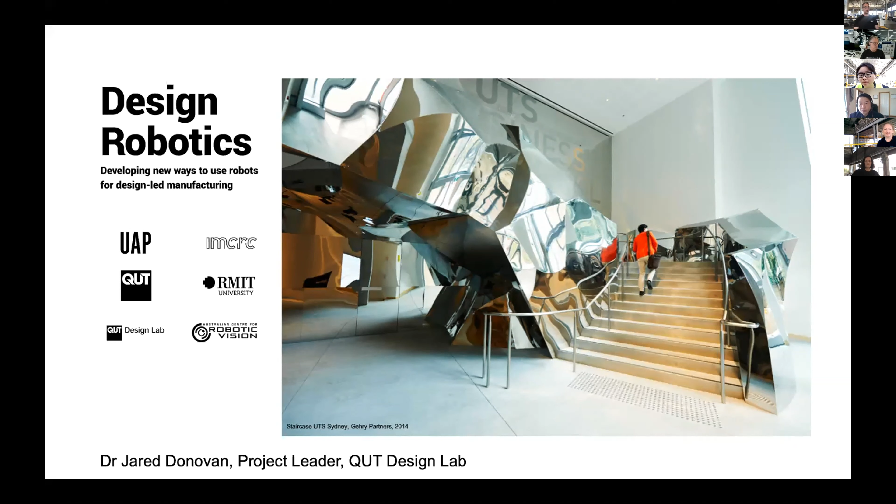That's probably enough to get us started, and I'm going to hand over now to John, who's going to start telling us about robotic vision.

Hi everyone, so I'm Jonathan Robertson. I'm a chief investigator on the project. We've got a section here where we're going to talk through robotic vision.

I'll start off with a bit of an introduction, then hand over to Amelia, who's next to me here. We'll then hand over to Jing, and finally over to Peter Corke, who's back in one of our labs at QUT.

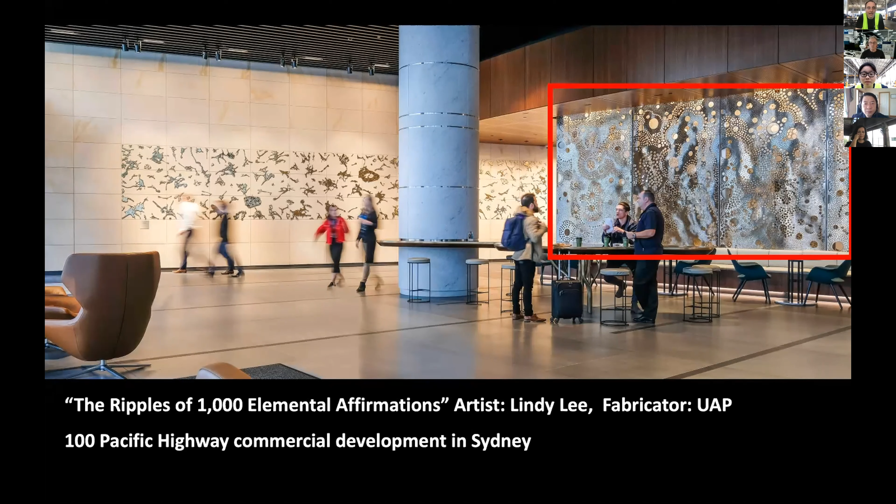What I want you to look at is the screens on the right hand side. These are flat sheets, and these holes and patterns you see there are put in by Lindy Lee herself. But there's some work that has to be done first before she can design her artwork, and that's a technique called linishing.

So these panels have to be prepared. Now, this is backbreaking work, very time consuming. You can see a tool there known as a burnisher, and we'll show you one of these on one of our robots in a little while. It's effectively a sanding task, and linishing just stands for linear finishing.

An operator here, in this case Matteo, who is based at UAP, has to stand there and linish this panel by hand, and it's very time consuming.

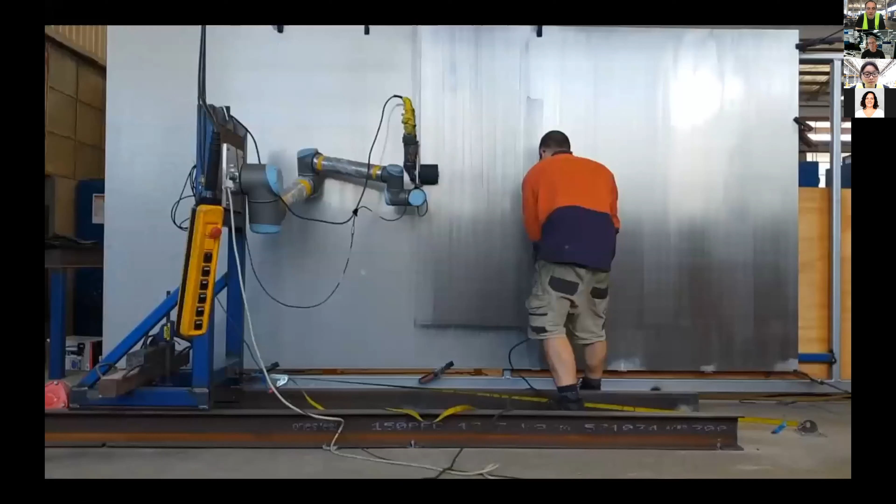So I'm going to show you a video now of a robot version of this linishing task. Matteo came to the team here and said he had to linish, I think it was 8 of these panels, and he knew it was going to take him a very long time. The estimate was about 24 hours per panel of him holding the burnisher, which, as you can imagine, is a lot of backbreaking work.

So Matteo worked with Amelia, who you'll see in a little while. They worked for 3 days and designed this robotic solution. You'll see Matteo's still there, he's still part of the job, but he's no longer doing the backbreaking work most of the time. He's lubricating, changing sandpaper, checking things out, and he's actually dragging the robot along - that's not a motorized system there. And then the robot is actually doing the linishing task.

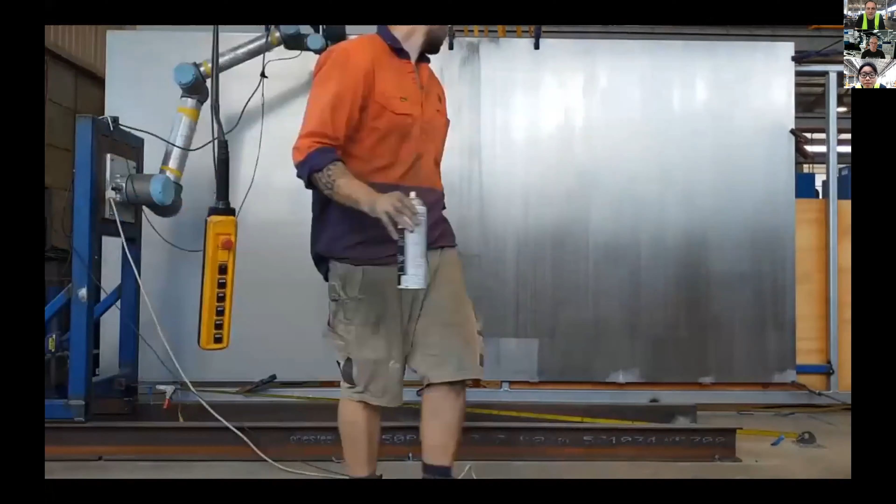Now, this is a relatively simple task for robotics. It's a 2D plate, known as an open loop system in the fact that the robot doesn't really know the plate's there. It's just been pre-programmed to go up and down, which means it actually misses some of the plate. If you look at the bottom of that plate, you'll see some parts that have been missed, where everything's slightly misaligned and the robot doesn't quite touch, or it can't reach. There's a few reasons why it may miss, but basically the robot doesn't really know that the plate is there. So we're trying to increase the sophistication.

We've now moved on to doing 3-dimensional finishing. Now you'll see here an artwork called The Kingfisher, by an artist called Emily Floyd. Again, this is fabricated at UAP in the shed next door. We've been focusing on finishing the feet of this bird. This particular bird is actually on the river walkway outside our building at QUT at Gardens Point here in Brisbane.

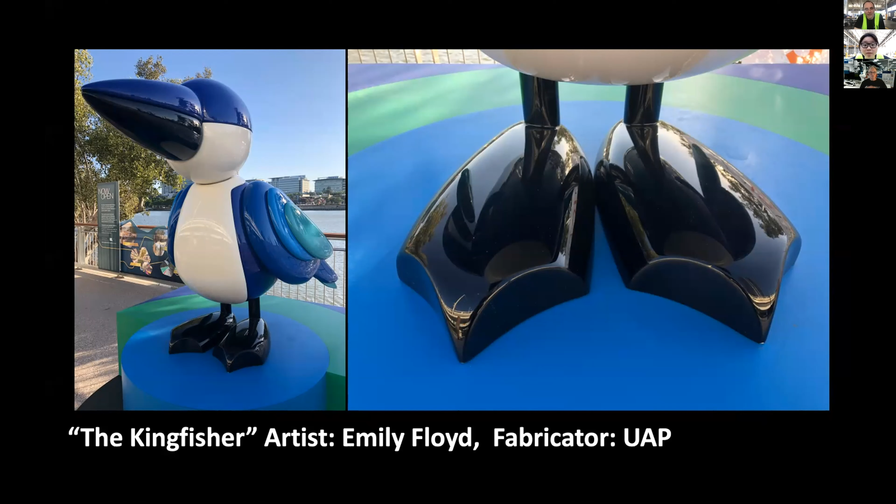And I should have put someone in there for scale, but it's kind of the height of a shortish adult. That's kind of the scale of this thing. So you can see this foot is relatively complicated, and just having our kind of open loop systems wouldn't be good enough to actually finish this foot.

So now I'm going to hand over to Amelia, and she is going to talk through our strategies for finishing 3D objects like this. Thanks for the intro, John. So as you said, I'm Amelia, and I'm a mechatronics engineer as part of the Design Robotics project.

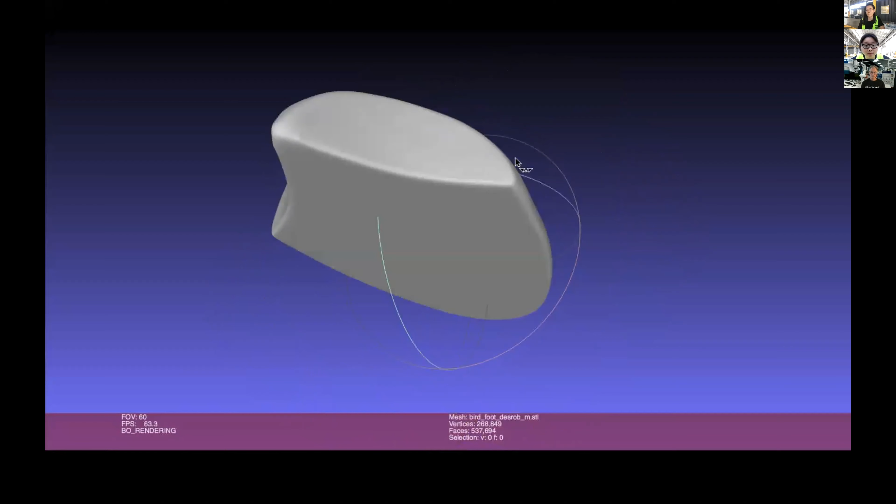So this first video here is actually a 3D scan of the bird foot that you just mentioned. It's quite common in manufacturing companies to actually have a 3D model of whatever thing they're about to manufacture, but it's not common for people to actually use it in the manufacturing process. So what we've tried to do is, one second, let me.

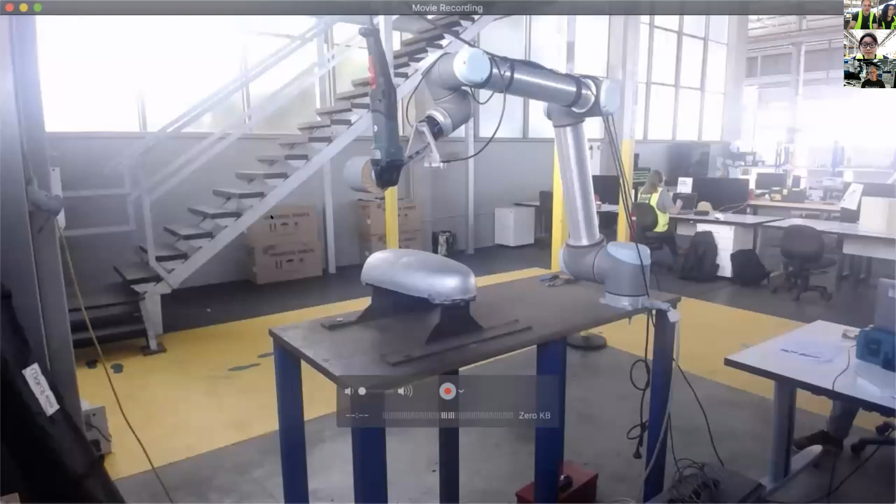True robot demo fashion. Hope it works. Let's start the robot. There you go. Yes.

So what we've tried to do is actually incorporate 3D scanning for two real reasons. The first one being when you actually have a perfect 3D model of a piece that you want to manufacture, it's not actually perfect, because actually making a physical model typically involves, in this instance, a casting process.

In this case, we mill it out using another robot, not this one here, to make a mold, which then goes into a sand mold and molten aluminium goes through and evaporates that mold to give us the product that the robot is currently scanning. Once we make that first mold, it's used as a template for future molds. And as you do that, it actually shrinks by nature of the process.

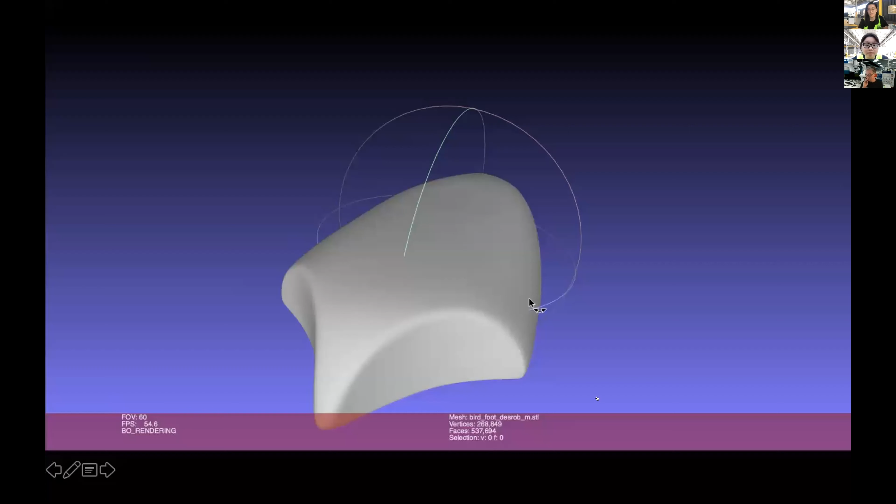And so this perfect 3D scan that I will now show you, go back to, this one. Yep. So this model that we were showing before is actually slightly larger than what we actually have. And of course, this shrinking is never uniform, so it's always a little bit annoying when you're trying to use it in the actual process. So that's the first reason for using 3D scanning.

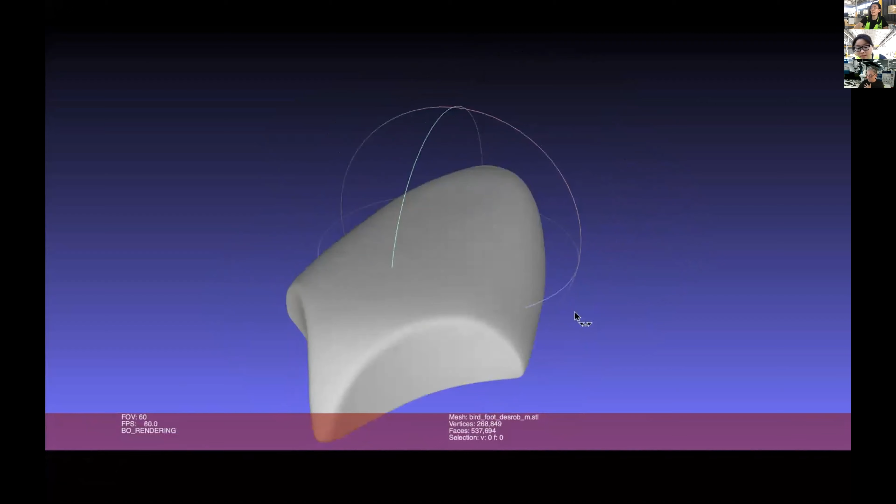And then the second is we actually need to be able to locate where this piece is in space with respect to the robot. Our 3D scanning in that demo gives a very rough estimate of where the bird foot is in space, and a very rough guess as to the size of this object, so putting it in a bounding box, we can generate a grid of points that the robot will visit and capture snapshots of what the object actually looks like.

So what we can see here in the red box is, in this instance, I think it generated 15 points based on the camera's field of view. Those are just 4 snapshots there. I'm not sure how familiar people are with this, but 3D scanning shiny, reflective, specifically metallic objects is always difficult. And of course, your environment impacts quite significantly. As you can see here, there are these little holes.

But if we capture enough of these, we can actually stitch them together, which is what the top right scan is here. And then it completes a somewhat complete model of what we need to deal with. And this model on the bottom here is just a filtered version, because it's a very dense point cloud, and that involves a lot more computing power that's not necessarily useful.

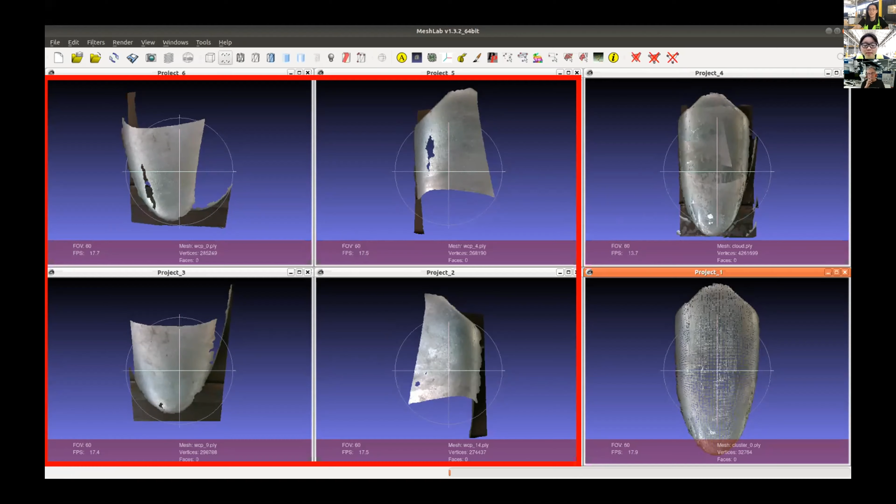This is also just a little video that I made that shows it stitching together. And this is purely based on knowing where each of these grid points are. We can just put all of those little snapshots together. And then this is a little video of what the filtered scan looks like.

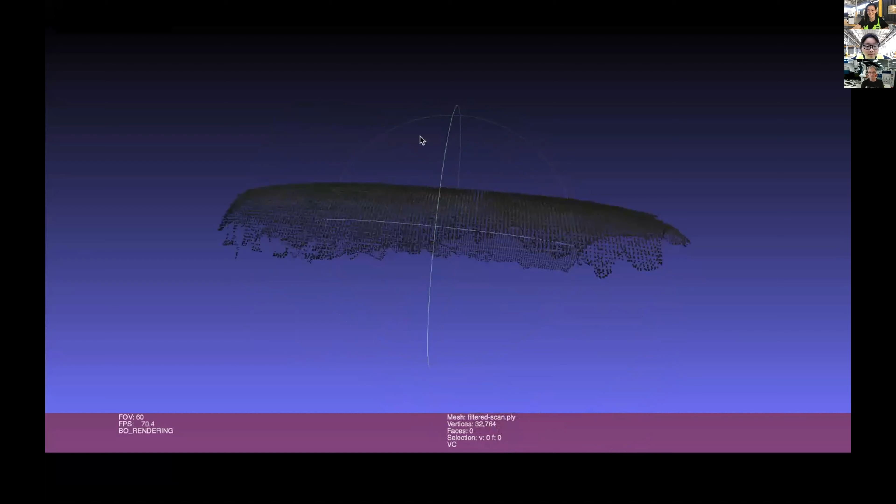Yeah. So once we actually have a scan, we need to actually finish it. Of course this involves path planning, and we do this through Grasshopper in Rhino. We essentially segment this model and generate points, and then we can execute them using force control at the same time.

But of course, this being an automated process, how do we actually know? Also what John was talking about before: instead of having an open loop problem, we would ideally like a closed loop problem where the robot can get feedback and figure out when we actually need to stop. So that brings us to Jing.

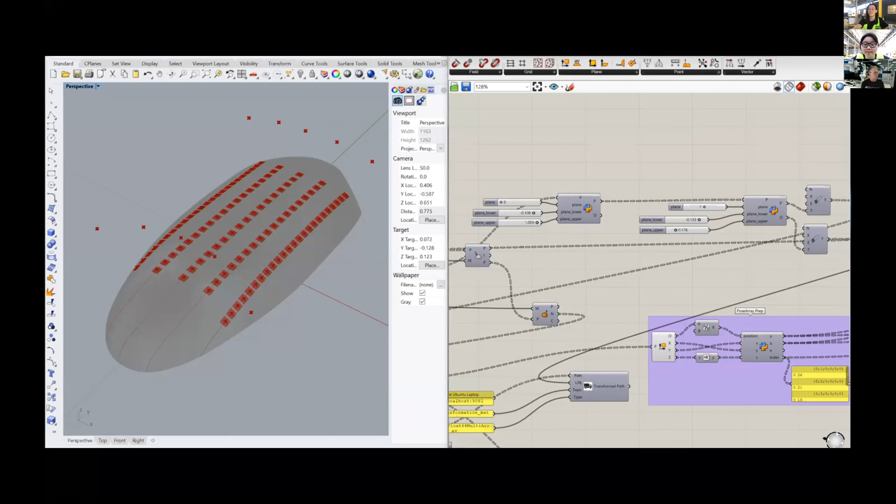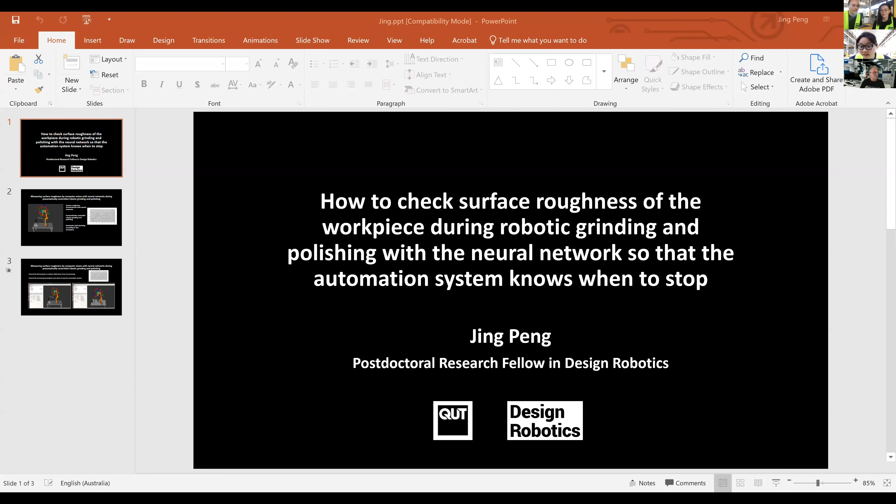The topic I want to share with you today is how to check surface roughness of the workpiece during robotic grinding and polishing with a neural network, so that the automation system knows when to stop. To solve this problem, we need to think about three elements. One is surface roughness measurement, an in situ surface roughness measurement with a neural network. One is pneumatically controlled robotic grinding and polishing. Another one is automatic path planning according to the workpiece.

This figure shows our test images of our neural network. Firstly, we used pictures of rough, medium, and smooth surfaces to train our neural network. Then we used different pictures to see if it can put the images into the right surface roughness categories.

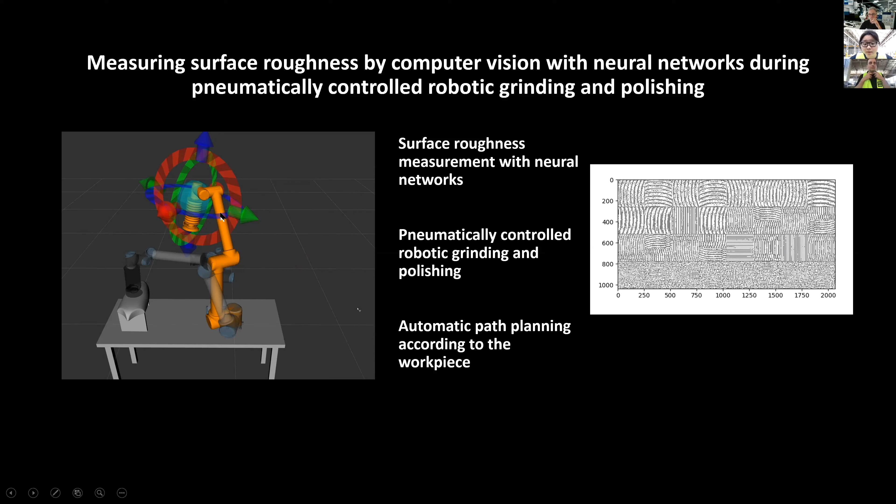For pneumatic control, this soft actuator here applies a certain downforce to the workpiece with physical compliance, and this orbital air sander here can both be pneumatically controlled. So our application is like this: a robot with a camera. When the robot with a camera sees the workpiece, it can automatically do path planning and follow the path.

Then it takes pictures of the surface and runs the pictures through the neural network to measure the surface roughness. If it's rough, it can continue grinding. If it's medium, then it can adjust its processing parameters, like the speed and the rotation speed. When the surface is smooth enough, it can stop running and go back to its rest pose.

So in our application, we need to implement one control loop to control the soft actuator to achieve the ideal downforce of processing, and implement another control loop with computer vision to control the processing parameters and when to stop the automation system.

As you can see here, it runs and it can stop. It's like an electric kettle. You press one button, the water is boiled and the kettle is turned off. So you can leave the workpiece there until the robot finishes its job.

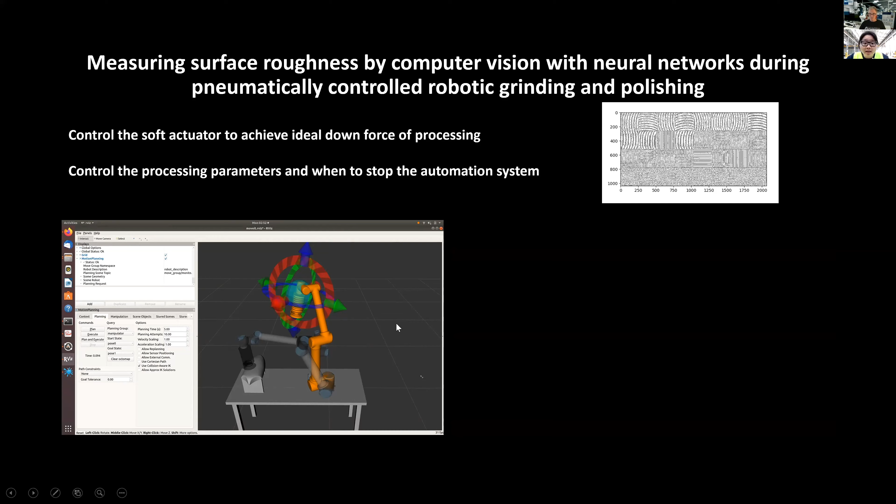So what I want to do is bring together some of the topics that have been mentioned by Jing and Amelia, and what the real challenges are for doing this with robotics today. Robotics is a mature technology. It's 60 years since the first robots entered manufacturing plants. But we still don't see robots routinely doing jobs like linishing and grinding. So why is that? I just want to touch on some of those questions.

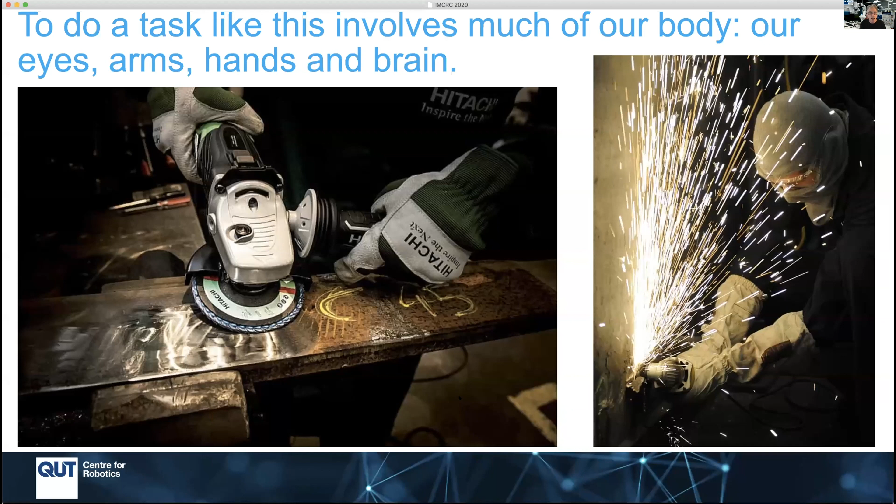A task like linishing, grinding, polishing is at the moment done by a human who picks up the tool, applies it to the workpiece, and does the job. This involves much of our body. It involves our eyes, the muscles in our arms to hold and apply the tool, our hands to grasp the tool, and our brain is doing an awful lot of work. So it's not just manual work, it really is a whole body exercise. Eyes, arms, hands, and brain are involved.

Even if you're unskilled, if you were asked to grind a piece of metal, the first thing you'd do is pick up the tool, and then try to find the thing you need to apply it to. This is probably an exaggeration; probably the workpiece is mounted on some pedestal on the factory floor. But you need to know where it is. And human beings are remarkably good at recognizing objects in the world.

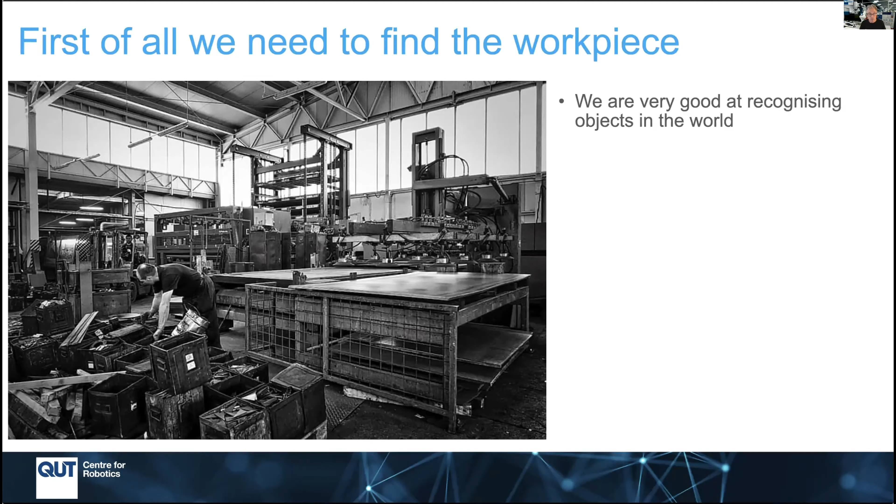Amelia showed some examples of building a model of an object whose shape perhaps we don't know in advance. We can use laser scanners and RGBD cameras to give us the shape and the position of the object. Once we've got that information in what we call a 3D point cloud, we can compute not only what the object is and where it is, but also the orientation of its different surfaces.

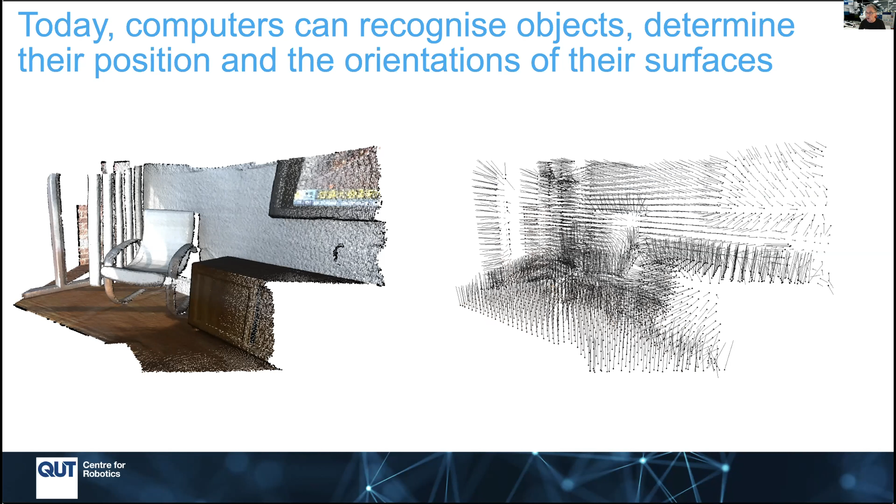Over on the right-hand side, there are all those needles, and they're basically normal to the local surface of the object. So that's pretty good. If you've got a camera system, you can recognize the object and work out the orientation of the surface, then we can bring the tool toward the surface, orient it correctly in space, and off we go with our grinding or linishing operation.

Now, robots today, and some of the ones that you saw in the videos, are the ones that you can just go to the shop and buy, a big industrial robot. They are remarkably capable machines. Modern robots are very strong.

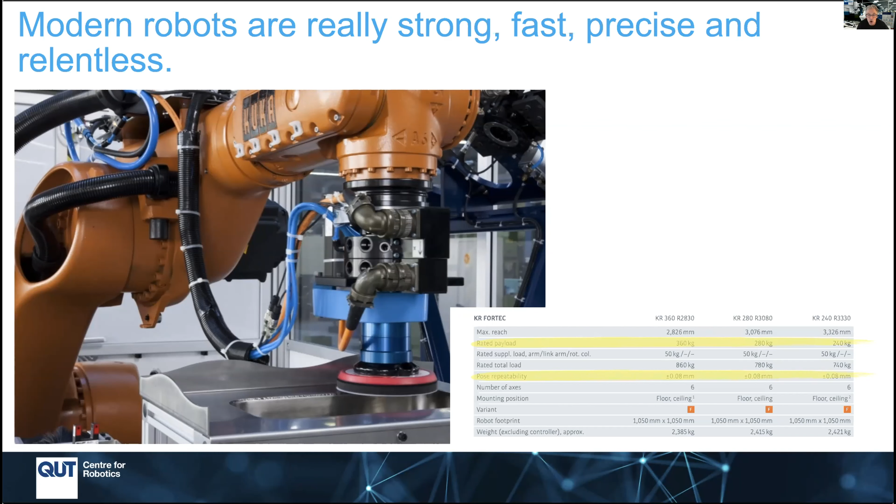So strong, fast, precise, and the other advantage of robots, of course, is that they are relentless. They go 24/7 and they won't get tired. So if I've got sensors that tell me where the object is and how it's oriented, and I've got a robot that's strong enough to wield the tool, is that enough?

And I'm going to say, no, it's not, because there's always going to be very small errors. The camera is not very precise, and the camera only says where the object is with respect to the camera. And the problem is we don't know where the robot is with respect to the camera.

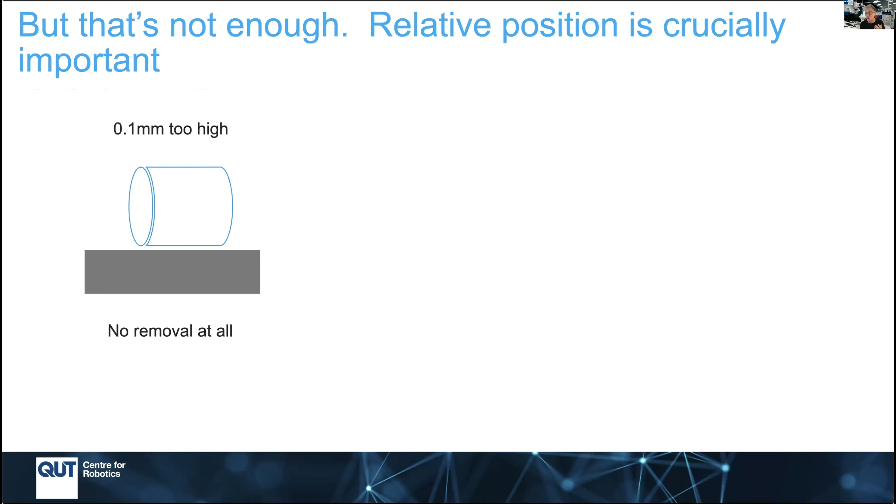And so if you have a very small error, say you're out by 0.1 of a millimeter, your linishing drum is 1/10 of a millimeter above the surface, then you're not going to do any grinding at all. You're not going to do any metal removal. And John showed an example of that at the bottom of that vertical plate.

On the other hand, if you're 0.1 millimeter too low, then you're going to be gouging out a lot of material. And that's going to damage the surface. It's going to damage the finish. So that's not very good. You want the Goldilocks solution where the linishing drum is just right. And so how is a robot going to do that? Or more interestingly, how does the human do that?

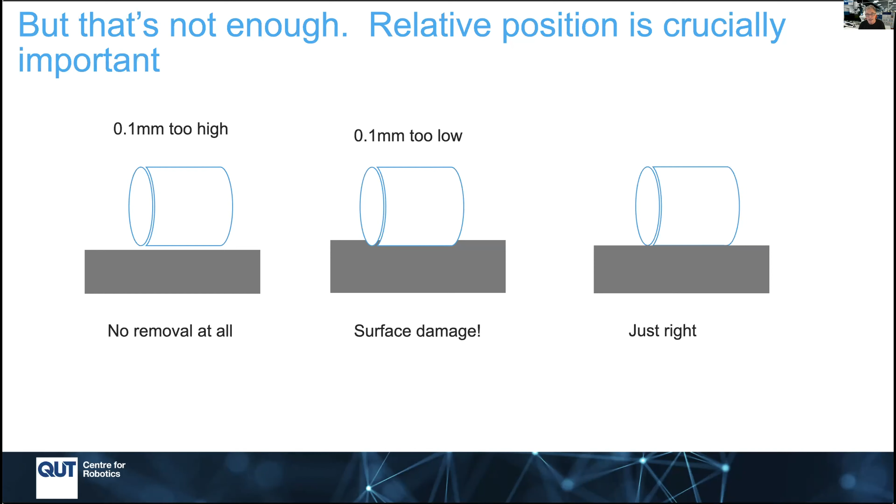And the human does this by using hand-eye coordination at one level to bring the tool close to the object. You use your hand and your eye and you minimize the error. And so the human being isn't measuring coordinates in X, Y, and Z.

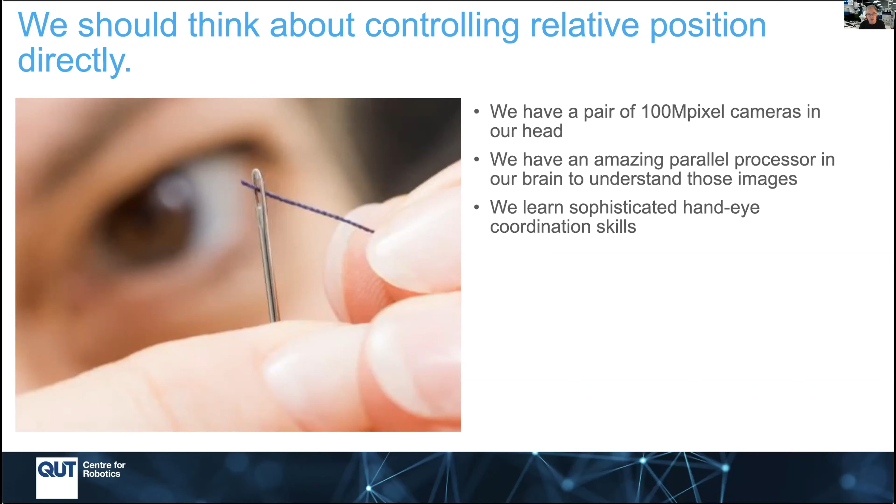The human who's threading the cotton through the needle, they don't know the position of the needle or the position of the cotton. They just want to make the difference between those positions equal to 0. And that's a really important principle that we need to bring towards robotics. So we use this hand-eye coordination skill.

But the other skill that we use in an operation like grinding is that we control the force that we apply through the tool to the workpiece. And that's really critical. And in our body, we use information that comes back to us from all the nerves that are embedded in our muscles to measure the force that the tool is applying.

We can feel the vibration through our fingertips, and we also use that to control what we're doing. And we also hear the noise from the grinding process through our ears, and we feed that back into the process. So we're using all of this rich sensory information to control the intensity with which we're doing the material removal operation. And that's what's key.

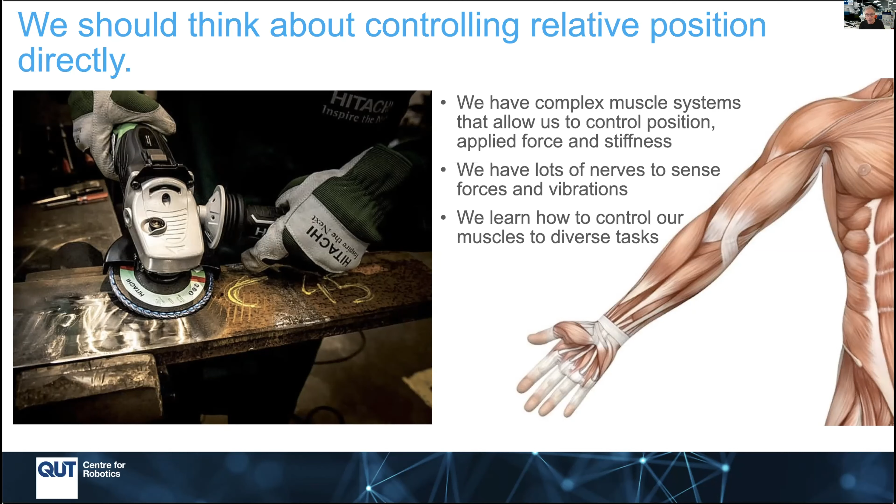And that's why a standard robot, although it's very strong and very precise, the problem is the robot's precise, but we don't know precisely where the thing it's working on is. That's the real challenge. But if we can modulate and control the force that we apply, then that problem goes away. So that then brings us to this new generation of robots, often called collaborative robots.